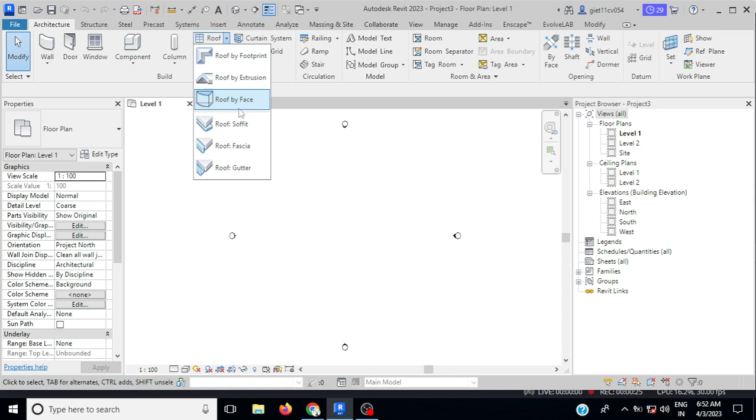For now we can hit here. Now we will see the notice. They ask us if we want to go level 2. Press no because we have not created at all. So now we are in roof command.

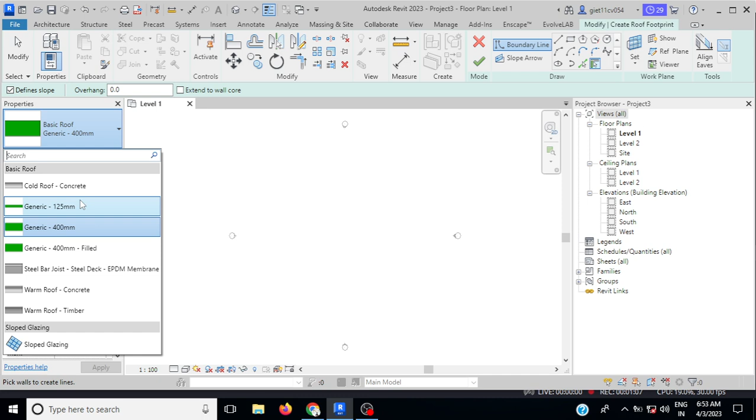Here in property panel you can open it. You can see the different type of roofs and layer you can construct. We just going to be using generic 100 mm. So here there is no generic 100 mm, so we can select this.

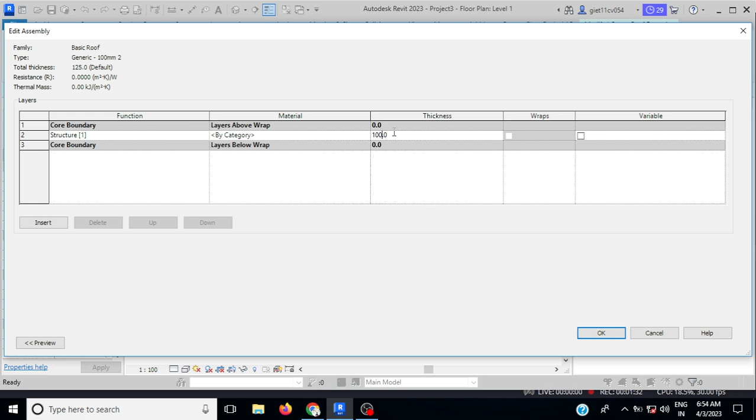Go in edit, create duplicate, and we can edit 100. Edit, change the 100. Apply.

Here we have the tools that we can use to create roofs. Now we are creating a boundary line. Take a rectangular tool, we basically create rectangular roof.

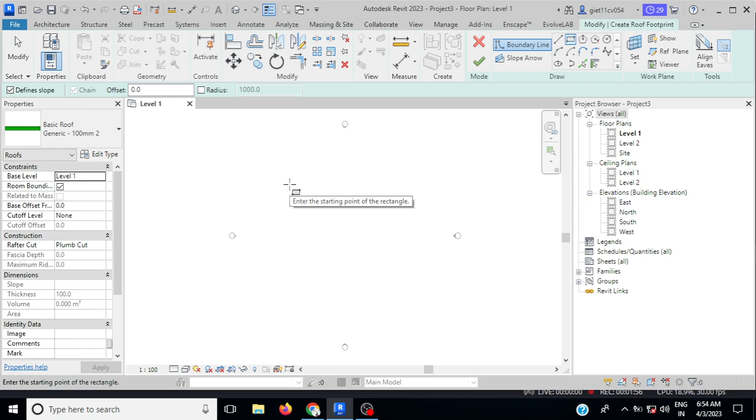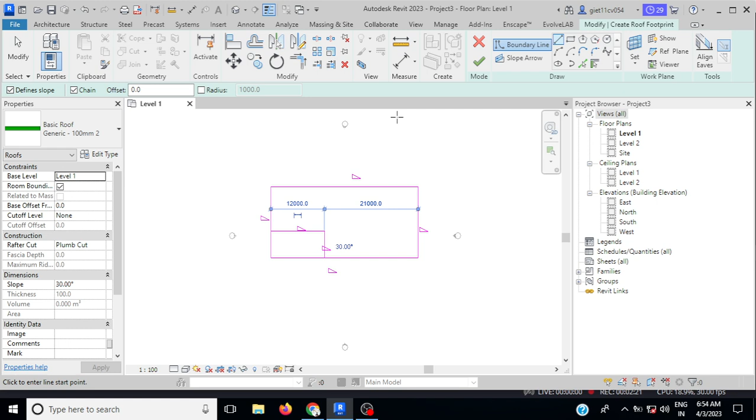But let's make it a bit more interesting and different. So I am going to take this one, and this. I am going with extend to connect this.

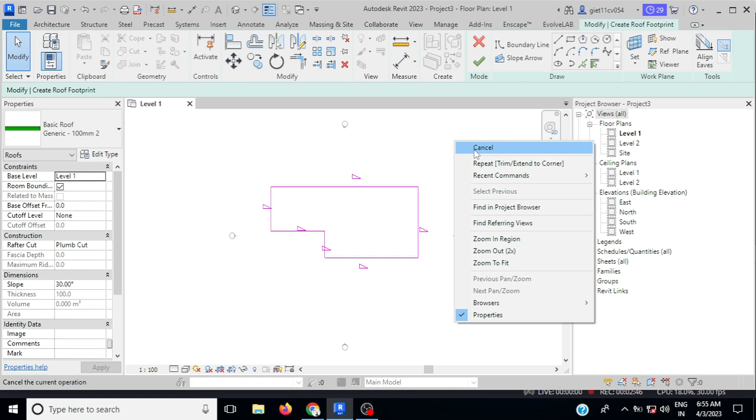Okay, now once we done this, go back to the modify tools. We can see every line has this little triangle here. That means basically every line defines slope.

Select this line, you see here define slope. Just uncheck this box. Now this doesn't define the slope. Let's leave this unchecked and see what happens.

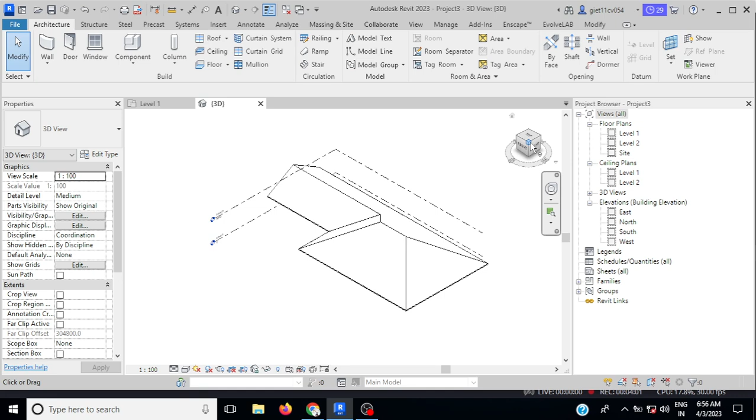Go in 3D. You can see here our roof is perfectly constructed by Revit. Here we didn't define slope, so you will see there is no slope here.

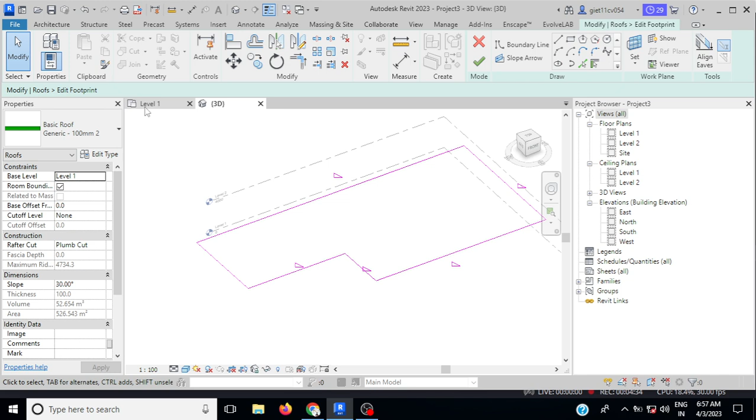There is no slope. Now you can select, go in edit footprint. We can either edit in 3D or level 1 also. Now we just uncheck the define slope box, and define slope. Now press OK.

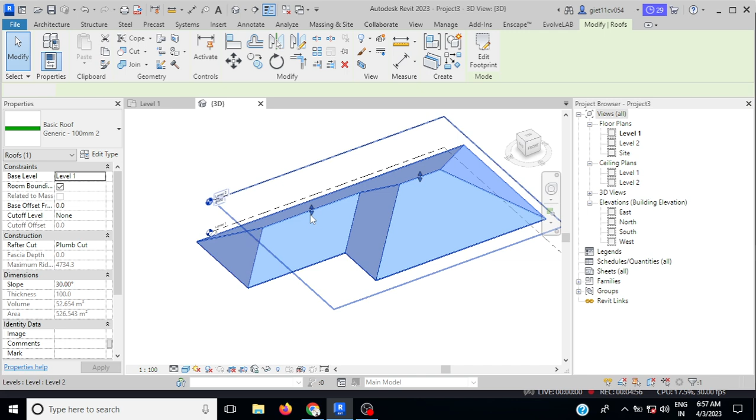Go in 3D. Now you will see slope has been defined here. Okay, select all, delete.

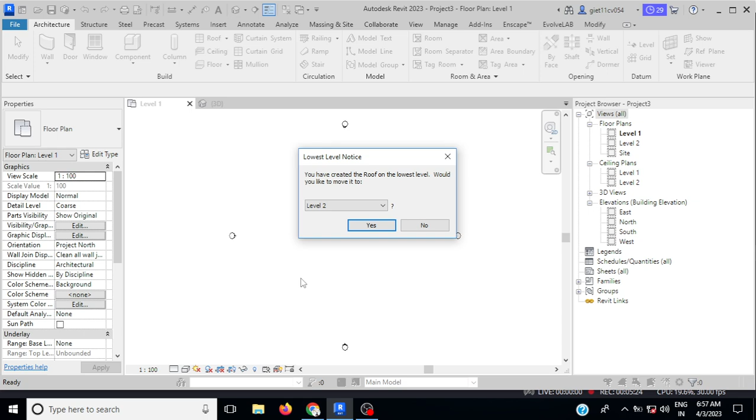Again go in roof command, we get the same notice, press yes, and I'm just going to do a rectangular roof.

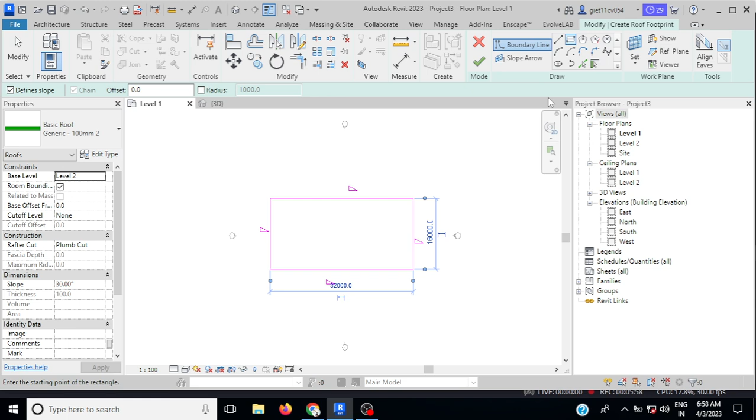Now we are going to see what the slope arrow means. This is basically if you want to create a bit more complex roof. So in order to use this, we just going to take the line command and just make a mark. This is not really roof construction.

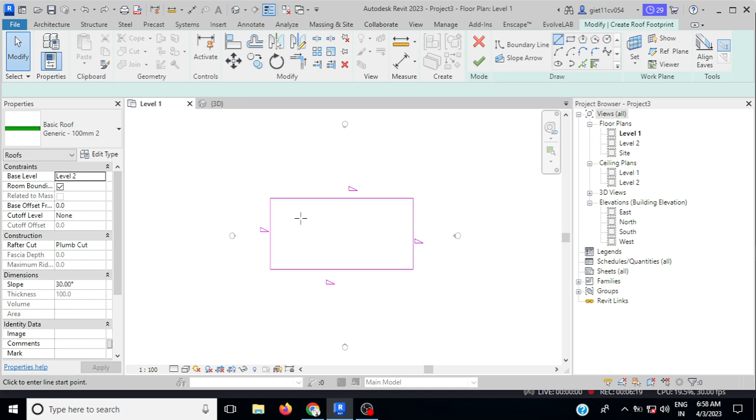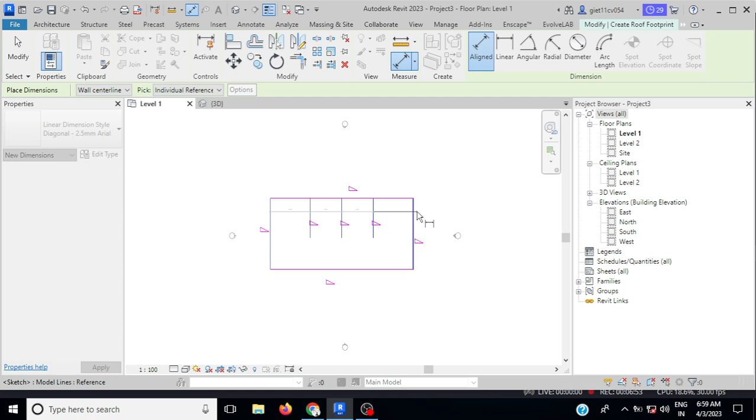We are just using it to mark certain places over here. Make it equal using dimension. Just click it here, you will see all are in the same and equal position. Delete all.

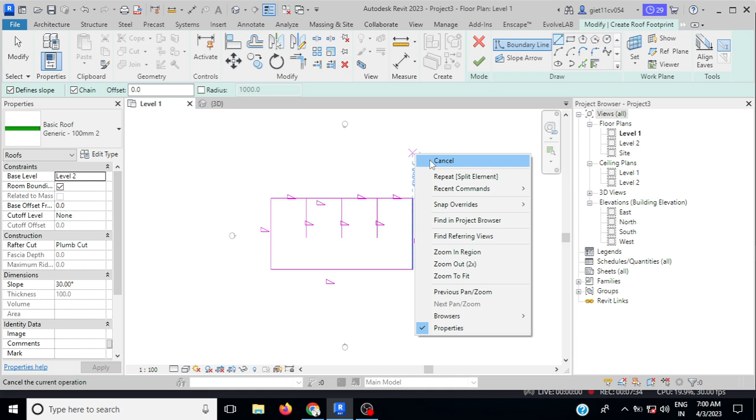Use split element to split this line, so click here, you will see the line has been split. So we can delete this because we don't want this. Select these two, uncheck this defines slope.

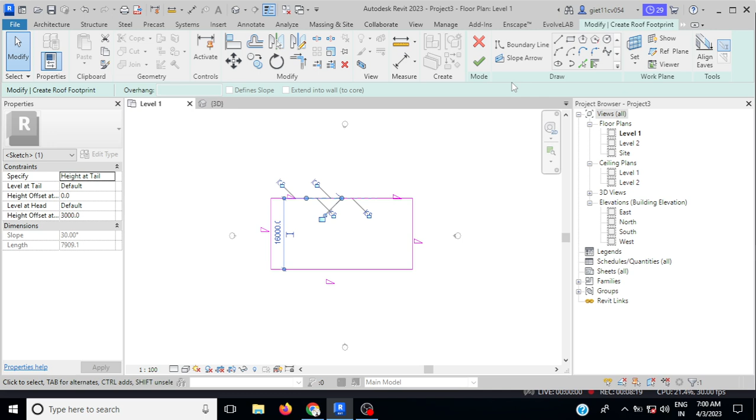Now I am going to use slope arrow. Click, create one arrow going this side and another arrow going this side. Select these two, you can see level at head, height offset - just provide height offset 2000.

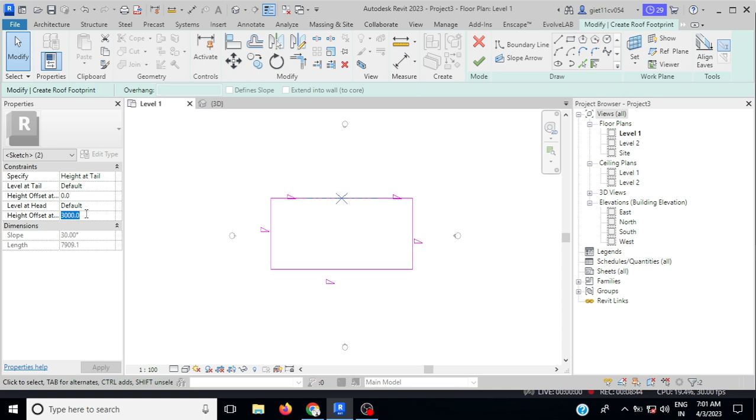Let's go 3D view. Watching 3D view, you can see here we did not provide this slope. In this way you can use the slope arrow.

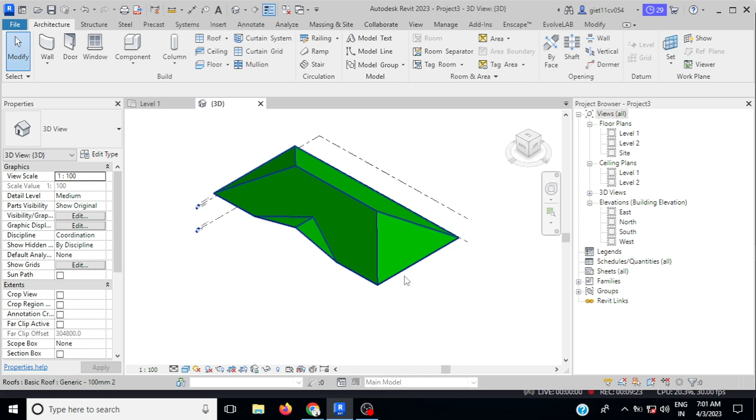Now select this one, just delete it, go in level 1. Now let's make the roof extrusion. First go to the roof, open it up, you will see roof by extrusion. But first draw a reference plane, so click on the reference plane.

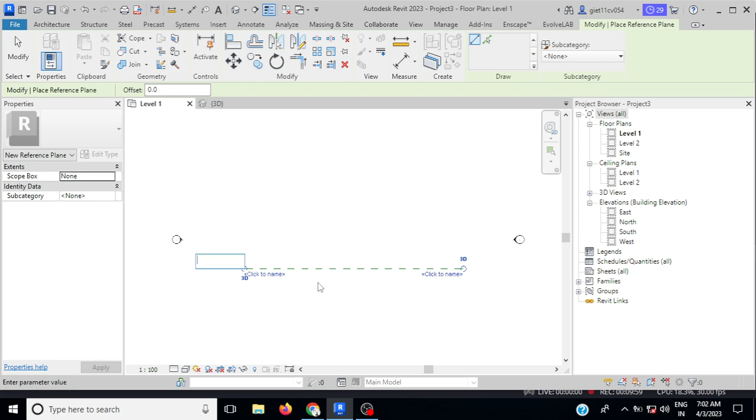Just draw a random reference plane, name it roof. Now we can use this basically to see from south elevation. Now let's go to the roof.

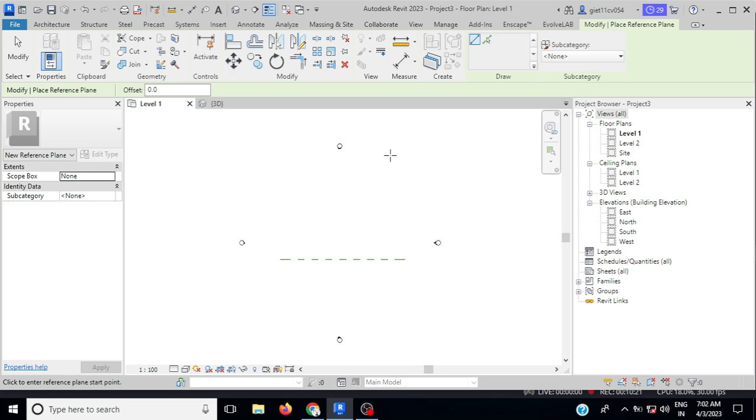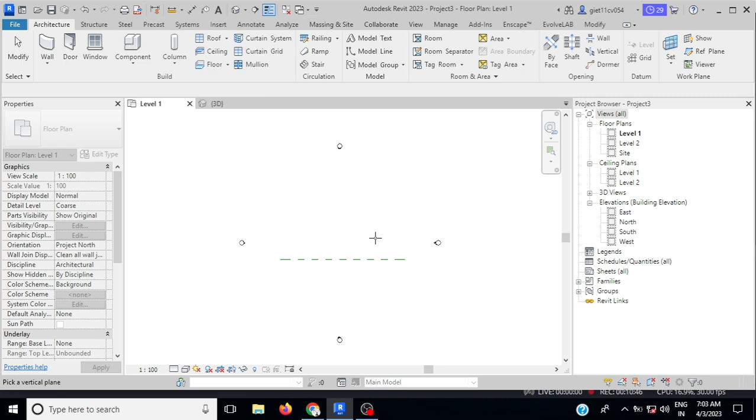Extrusion, you will see this notice - select, just pick a plane and press OK. Now it shows us basically which elevation or view we want to use. So choose the south elevation.

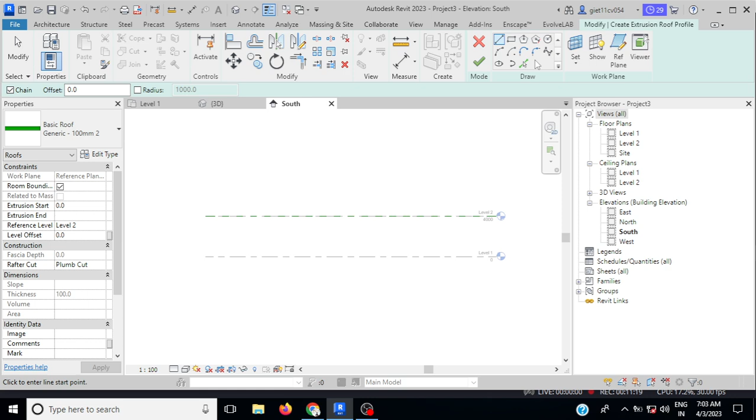Now it asks us which level do we want to associate our roof to. So level 2 - we just going to choose level 2 because it's the upper level. We can create it by using spline line, spline tools.

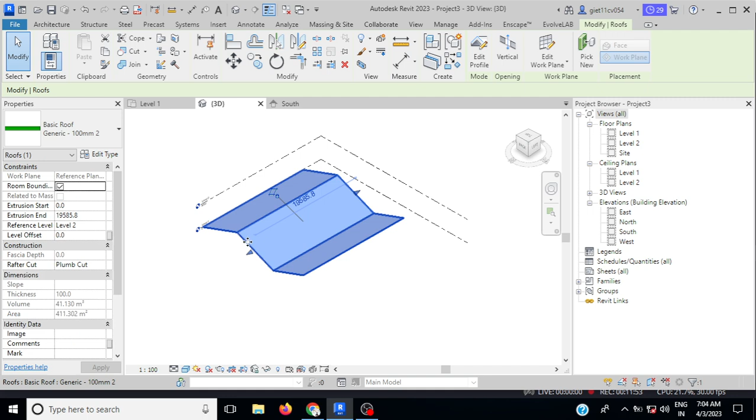Go in 3D view, you will see. You can just edit by this also.

In this way you can create your roof in different types as per your requirement.